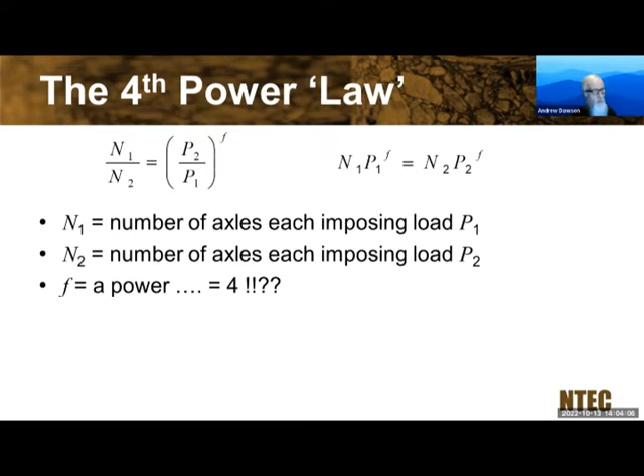So what is the fourth power law? Well, you may have seen it in this way, which says that the number of axles of one particular load type can be equivalent to a number of axles of a different load type according to the relationship shown here, however you prefer to write it. And they then say that F, the power, is 4, maybe.

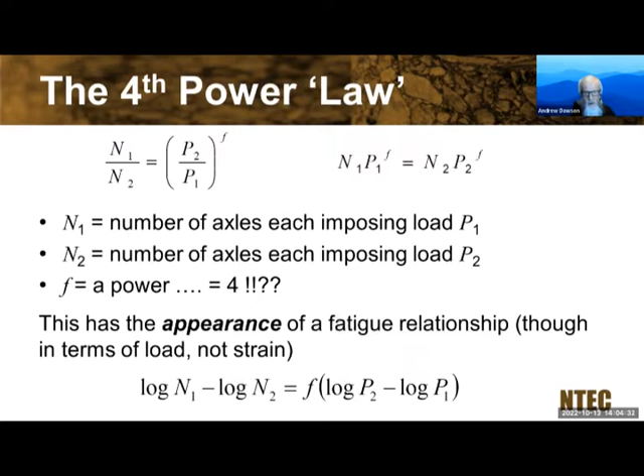Now, that has the appearance of a fatigue relationship. Those of you who know about material fatigue, it's very similar to a fatigue relationship, though it's in terms of load and not strain. Usually when we talk about fatigue, we talk about it in terms of strain. So if I take the logarithms of the equation on the left at the top, I get the one at the bottom there. And I can plot that graphically in this way: logarithm of number of cycles along the bottom, logarithm of load vertically, and you get a gradient of minus the power F.

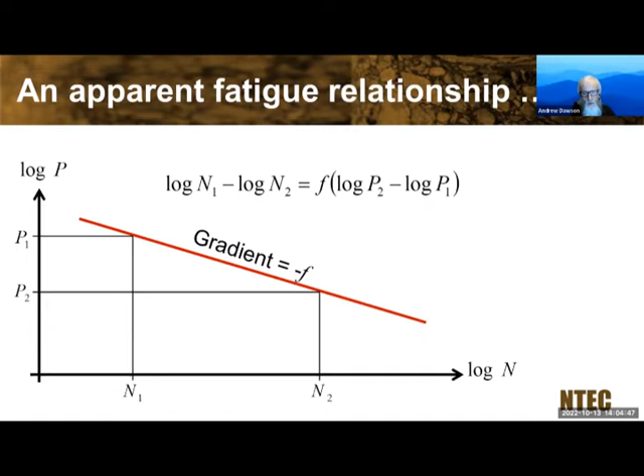So it does look a bit like a fatigue relationship. Why do we need this so-called law? Well, axle loads vary across our pavement. They're not all the same. They vary in magnitude.

Cars less than half a ton, trucks more than 12 - I'm talking about axle loads here. Number of vehicles, well, maybe less than 250 on a low volume road, maybe 50,000 or more on a freeway lane. And they vary in spectrum: there's cars, there's trucks, and the trucks have different axle loads as well.

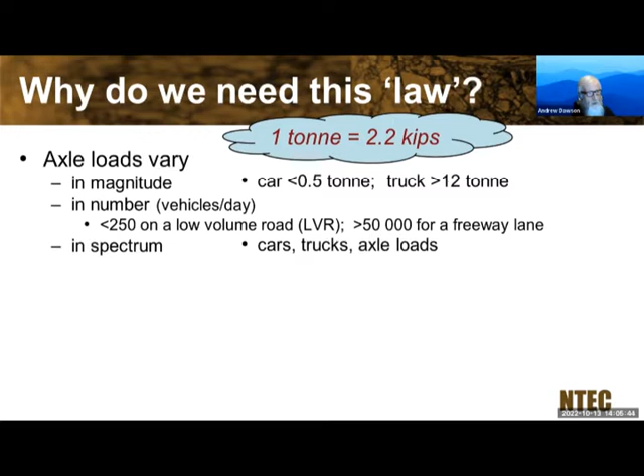And for those of you who won the War of Independence against the UK, but failed to win the war of independence of metric units - I'm going to use metric units, but if you're more familiar with US units, then a ton is about 2.2 kips. Now, the pavement engineer knows increments of pavement damage are somehow proportional to axle load, but only somehow.

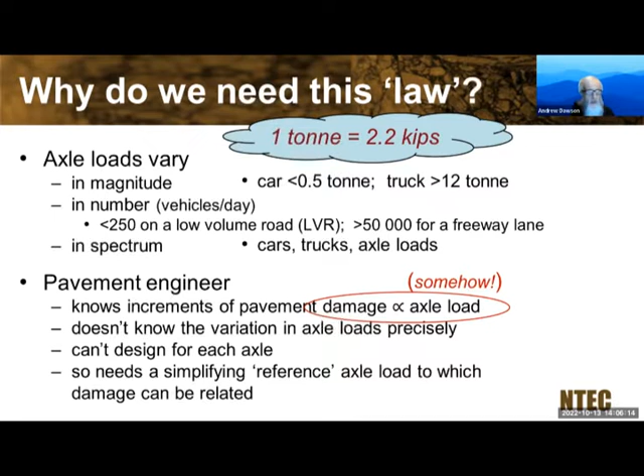He or she doesn't know the variation in axle loads precisely, and you can't design for each axle that the road is going to take, even if you did know all the axles it was going to receive. So we somehow need a simplifying axle load to which the damage can be related. So that's why we need it.

So this above relationship, the fourth power law, allows equivalencing actual loading. Let's call this P2, that's an actual load, and there are N2 passages of it, to some reference loading, which we'll call P1, and there are N1 passes of that reference load.

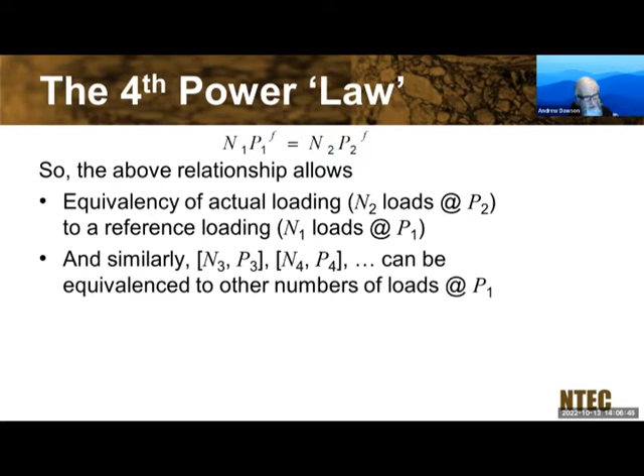And similarly, we can do that for other actual loads, P3, P4, however many you like, and we can equivalence those all back to the standard actual load, the reference one, P1, and we can add up all the numbers that we've got. And so we can get the total number of reference loadings, and we can use that in design.

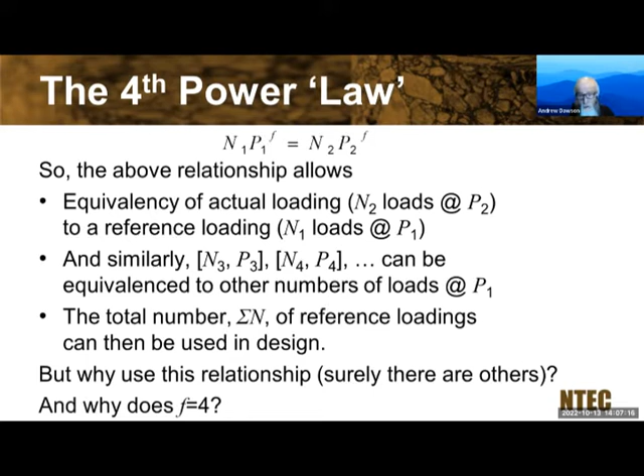But why use this relationship, this power law relationship? Surely there are others we could use to make this equivalencing. Why do we want to use that one? And why does F have to equal 4? Why shouldn't it be something else?

Well, to answer those questions, we need to go back to the AASHO road test. Now, the AASHO road test was performed in the late 50s, early 60s, near you, much nearer you than me. And on a particular subgrade, the traffic all went at a constant 56 kilometers an hour. What's that? That must be 35 miles an hour? Not sure. The traffic was canalized, that's to say every vehicle went behind every other vehicle.

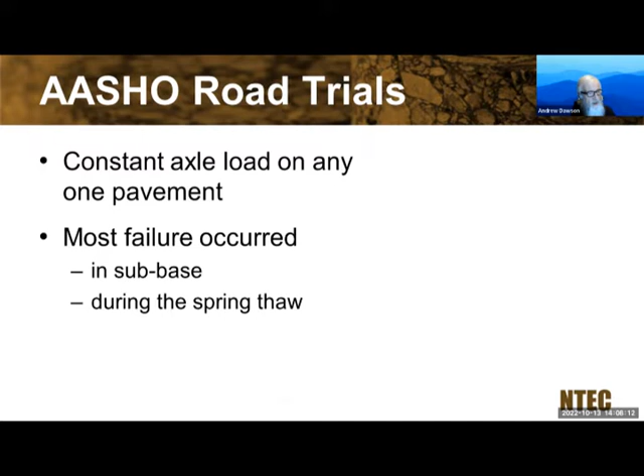And there were a bit over 1 million axle loads over a 2-year period or thereabouts. And on any one particular road or track, there was only one axle load, so there was never a mix of axle loads on the same pavement. There were different pavements with different axle loads. And most of the failure occurred in the subbase, primarily during the spring thaw.

But the failure criteria was serviceability. In those days, there wasn't all the sophisticated equipment we have these days. And so they sat people in a car and drove those people around, and those people assessed the quality of the road through the vibrations they felt in their buttocks. So it's not a very scientific way, you might say, but that's how it was done because that's all they could do in those days.

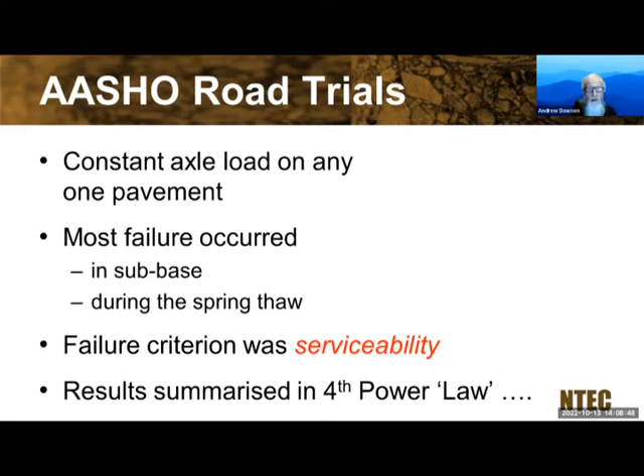And they summarized the results. Well, some of the results were summarized in the 4th power law, as we've seen already. Now, what this says, let's actually look at what this law actually says. It says that the decay due to N1 passes of load P1 is the same as the decay of N2 passes of load P2 at this limit serviceability condition, when the people in the car felt the road was at the same limiting trafficable condition.

Then they looked at the number of passes in one pavement and the number of passes in another with the 2 different loads on, and equivalenced those pavements.

But it's important to know what they were doing and what they weren't doing. So it doesn't say, even though we might like it to say, that cracking or rutting or any other failure method equals decay, because we don't know how those contributed to the serviceability assessment these people did sitting in the back of a car.

It doesn't say that decay is proportional to load to the power 4, or any other power come to that, because they only looked at a condition where the decays matched, where the roughness matched. So it doesn't say that decay is proportional to N either, the number of passes. If they'd only done half the number of passes, would they have felt just as uncomfortable, or only half as uncomfortable? We don't know.

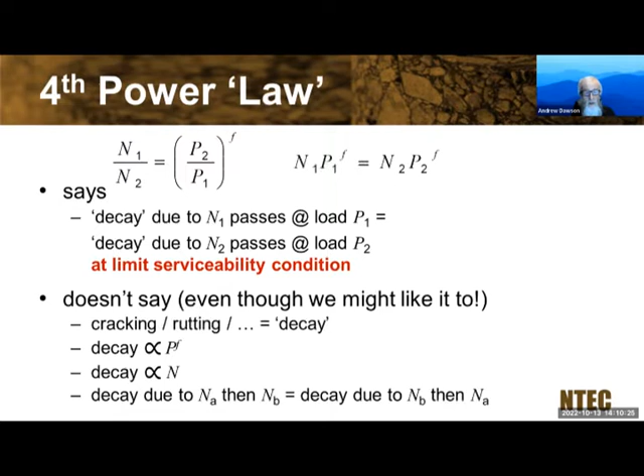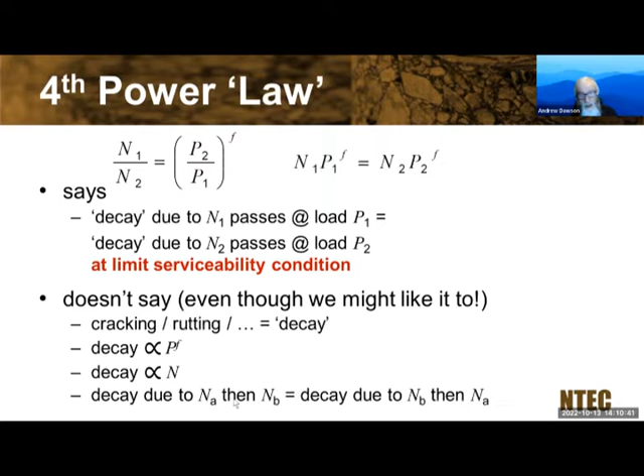And then it doesn't say that if you had one type of traffic followed by another on the same pavement, that would be the same as the order reversed. So it doesn't mean that N passes of load A followed by N passes of load B is equal to the same thing the other way around. Lots of things it doesn't say.

And they produced this chart here, and as you see, there was somewhat fudging to get this. And as you see, actually, they didn't get a power of 4, they got a power of 4.15. But there you are.

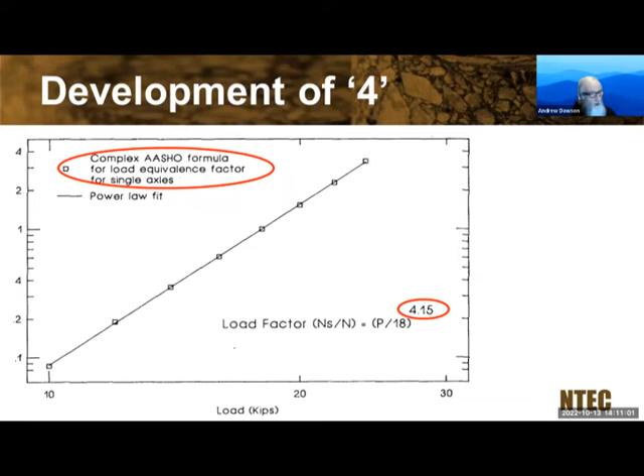Now, added to this has come Miner's law. I don't really know how it got added to this data. The Miner, or strictly speaking, the Miner-Palmgren law, says that you can add up the damage caused by one set of cycles to the damage caused by another set of cycles. So what it says here is that if you've got N numbers of cycles of load I, compare that to the number of cycles you need to apply at that size of load in order to get a unit of distress, whatever distress is, complete distress.

So if Ni is less than the number of cycles to failure, you get a proportion of the decay, and you can add that to decay caused by other cycles, other loads. This says that the order of loading is unimportant. We don't know that, but that's what this relationship implies. It says that damage by twice the number of cycles of any particular load gives you twice the damage.

But it doesn't say that linearity or a power relationship with load is necessary. It does say that linearity with N is necessary.

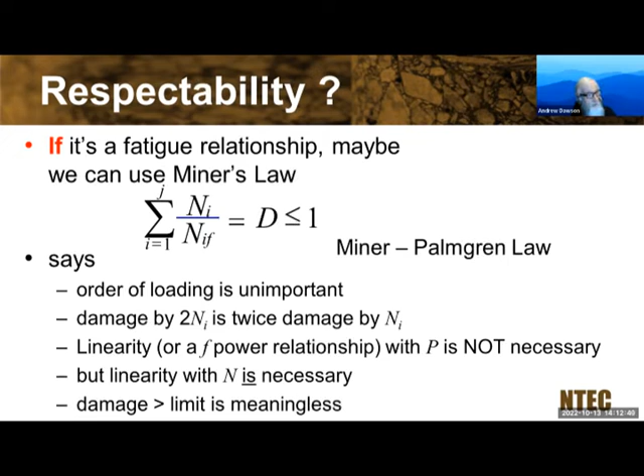And of course, damage greater than the limit is meaningless in the Miner-Palmgren relationship. You can only get complete distress, complete decay.

I might also take issue with the word 'law.' A law suggests ultimate truth, like laws of gravity or Newton's laws of motion. But the fourth power law is empirically derived and empirically validated. And as I'm going to show you, there are many counterexamples and invalid assumptions as well. So squashing it into the Miner-Palmgren framework gives it a level of respectability, scientifically speaking, that I don't really think it deserves.

All right, let's move on to look at some of those examples which don't fit. Take a Portland cement concrete pavement.

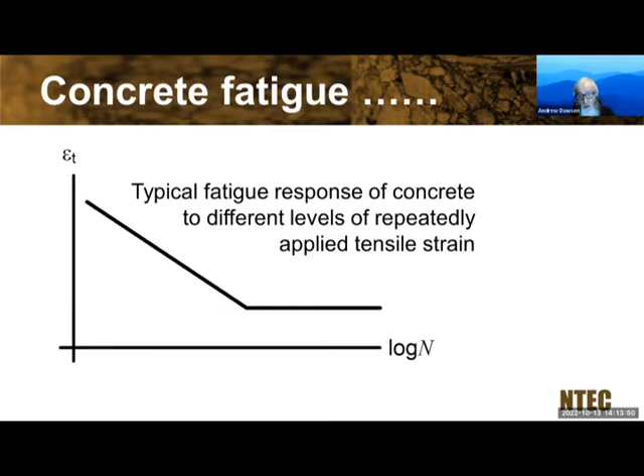We know that if we were to plot a fatigue line, it would look something like that. So there is, at low strain levels, in principle, an infinite number of cycles possible. Well, that won't fit the power law relationship.

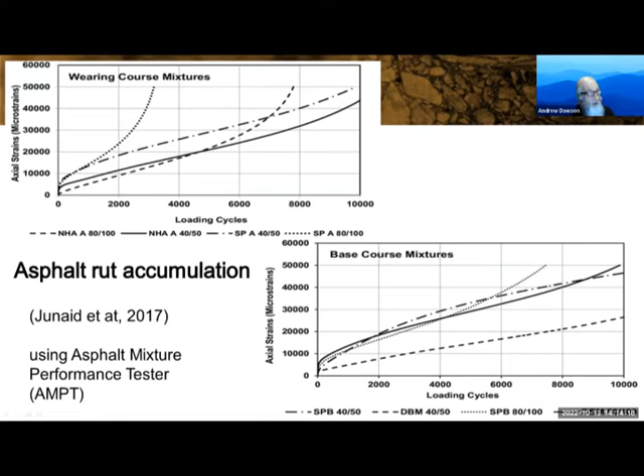Look at asphalt rutting. Here's some data from a variety of mixes. Now, which of those could fit into this? If you take logarithms, will you get a straight line? Well, you might for one of the curves in the bottom figure, but for all the others, you certainly won't. So they don't follow a power law relationship either.

What about asphalt fatigue? I said it has some similarities with a fatigue relationship. Well, here's three asphalt mixes: a foam mix, an emulsion mix, and a dense bituminous macadam, something like an asphalt concrete. This data is from various people, but plotted on this chart.

So let's fit this to the... it's not exactly the fourth power law because we're using a strain ratio here, not a load ratio, but forgive me for a moment. So the slope of this line, if you convert that to F, gives you 4.35. Well, that's close to 4, isn't it?

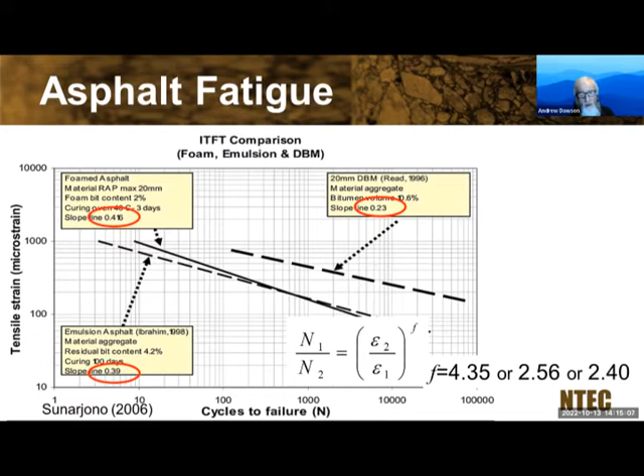Sounds good. What about this one? Well, that's going to be 2.56, or the final one, that's going to be 2.4. They're quite a long way from 4, aren't they?

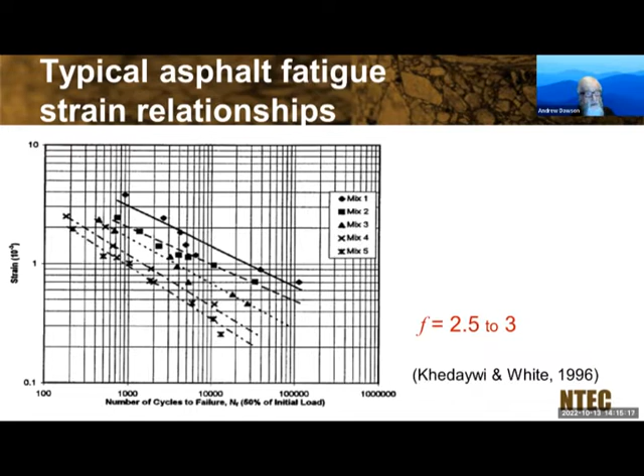Here's some other data, various mixes. F, if you use it that way, is somewhere between 2.5 and 3, not 4.

But when we do a strain-controlled test, and most fatigue testing on asphalts is strain controlled, we're actually getting a reduction in stiffness with loading because we're getting damage as we go along. So the stiffness is dropping, and therefore, to produce the same strain, we don't need as much load. So they're not constant loading tests like pavements were in the AASHO road test.

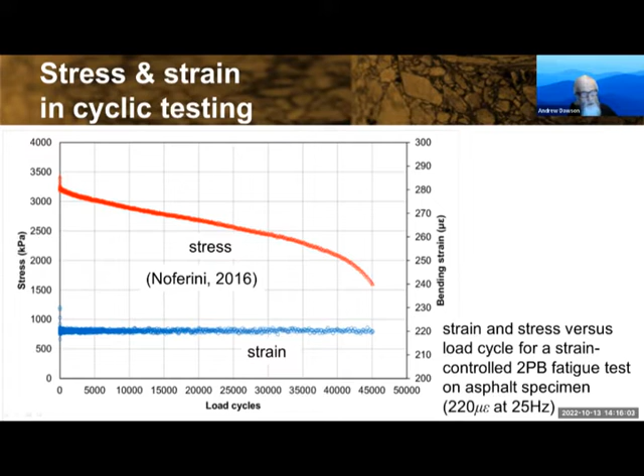So here's some data from which you'll see how the modulus is effectively reducing. Well, the stress is reducing, but because the modulus is reducing, just in order to keep the strain constant.

There are a few published data for stress fatigue lines. Here's one which I dug out from somewhere. So you've got stress vertically rather than strain. We can draw a straight line through it.

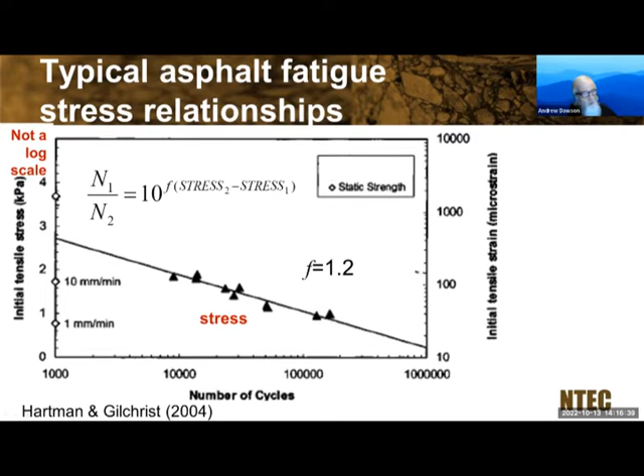So it looks again like a fatigue line, but notice this is not a logarithm of tensile stress, it's a natural scale. So if we're going to plot that with a power law, we'll need to use this equation, and F, from that equation, would be 1.2. So it doesn't seem to work with stress either.

What about granular materials, which I know more about?

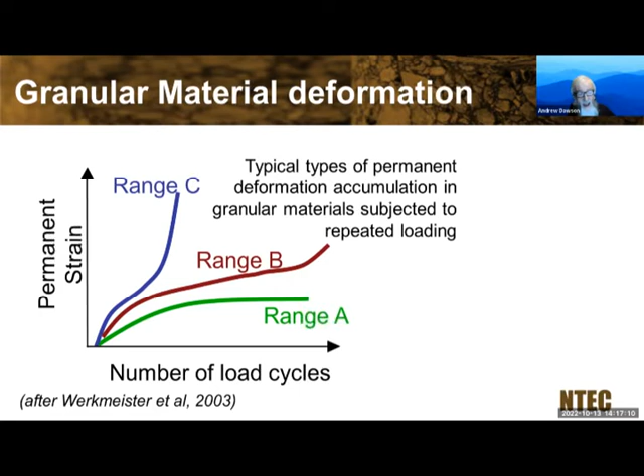I work with Sabine Werkmeister, she's now in Dresden in Germany, and she's done lots of testing on aggregates. You can get different types of behavior at different load levels. At a Range A level, things stop, the rutting stops. Range B, it goes, and then eventually begins to accelerate. Range C accelerates very quickly. You won't model any of those with a power law.

Here's a pavement we constructed quite a long time ago in Scotland, showing the rutting. In this one, we put over vehicles with axles of different weights. In phase 1, we've got a vehicle with a front axle of 3 tons and a rear axle of 8 tons. Using the fourth power law, that equivalence is 1.01 standard axles. We did 1,000 passes of that vehicle, nearly 1,010 standard axle passes. Then we did additional load for 115 passes, and then a really very high load for the remaining 1,000. Using the fourth power law, the equivalent number of standard axles goes from 1.5 to 6.3 on each vehicle.

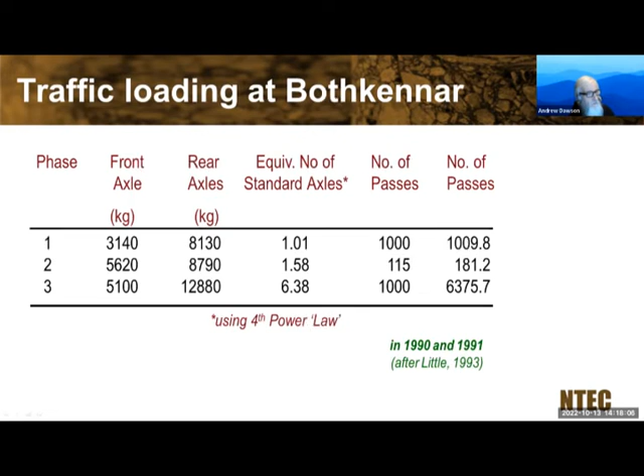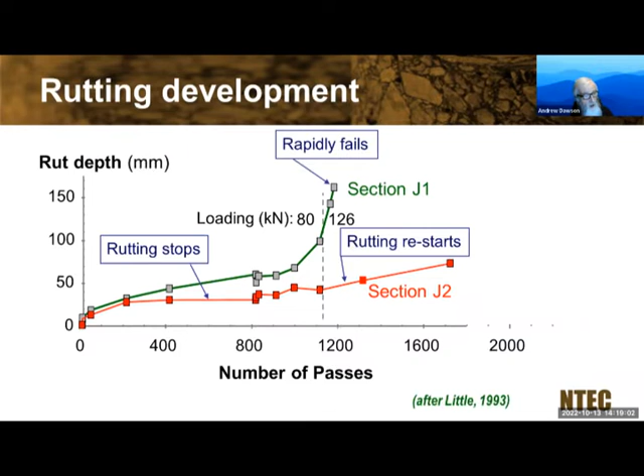You can see how the green line suddenly, when we put the extra load on, shoots up very much quicker. The red line, which had stabilized, then goes into a steady increase. So here the rutting stops. Here this rapidly fails. Here the rutting restarts when we put the extra loading on, but it's still going up in an orderly fashion.

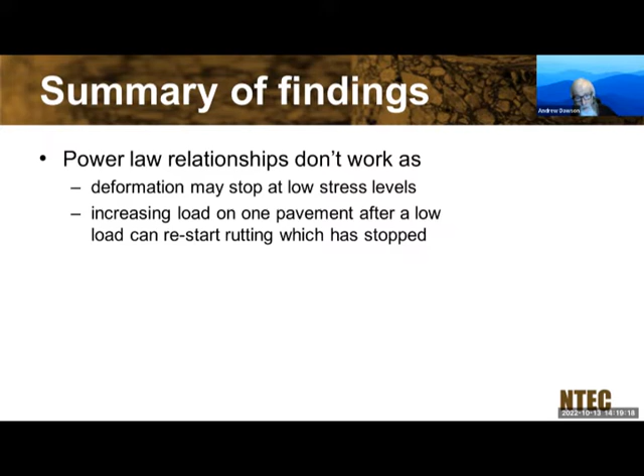So we've got different relationships for different loading and different materials. The power law doesn't work because deformation can stop at low stress levels. It can stop and then restart when we increase the load a bit, and we can get this runaway rutting as well.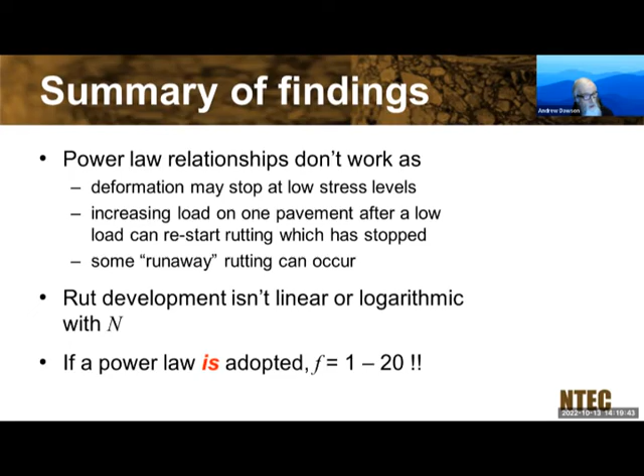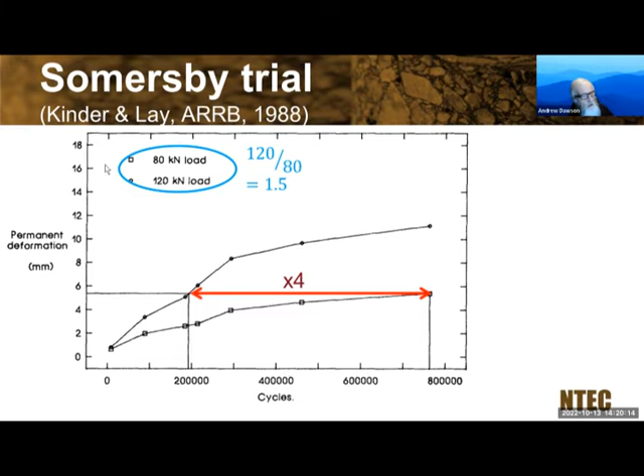Here's a thicker pavement. This was some work done a long time ago in Australia, using the accelerated loading facility, the ALF machine. You'll see they've got 2 loads, an 80 kilonewton, 8-ton axle, and a 120 kilonewton load. So the ratio is 1.5 times bigger for the second loading. Now, this distance between these is about 4 times. So that would suggest a power law of 3.4. 1.5 raised to the power 3.4 gives you 4, which is the distance, the difference. So there seems to be a 3.4th power law.

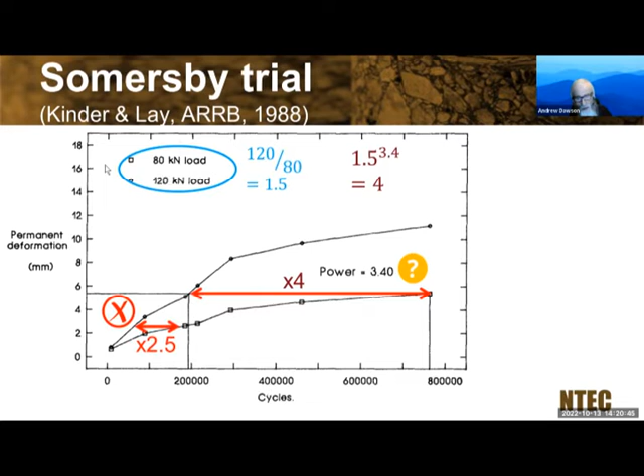Maybe that's not too far from 4. What do you think? But had we done it down here, look at the difference here. The difference here is only a factor of about 2.5. So certainly we get a much lower power law down there. Certainly doesn't work down there.

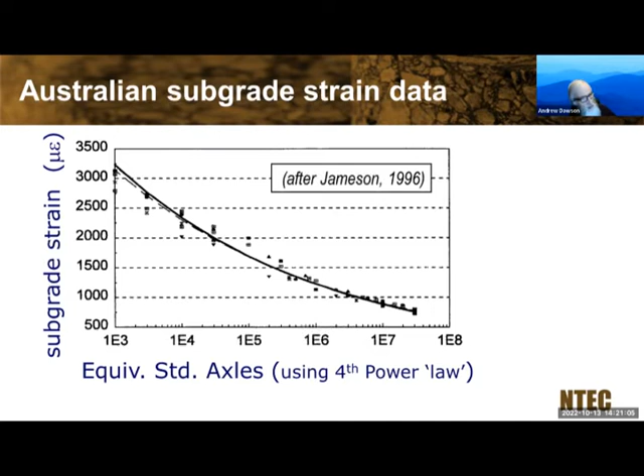Some other Australian data. Here they've got the subgrade strain, which is often related to rutting of a pavement, with equivalent standard axles using the fourth power law along the bottom. So there's some relationship for a range of pavements, I think about 25 pavements, relatively thin asphalt. They looked at the vertical transient subgrade strain in the pavement. They had instrumented pavements, and related that to rutting failure, finding that they could say the number of equivalent standard axles was related.

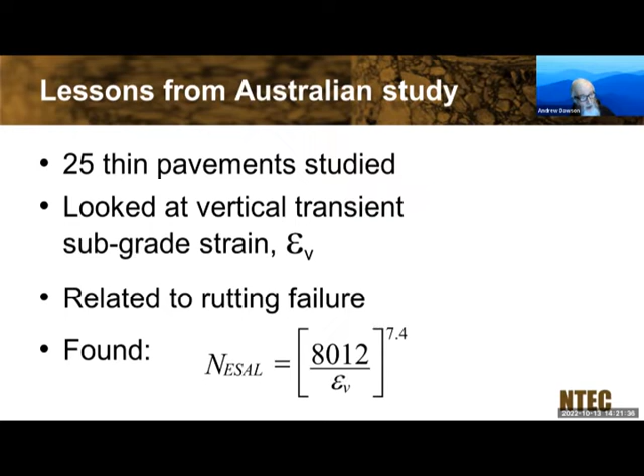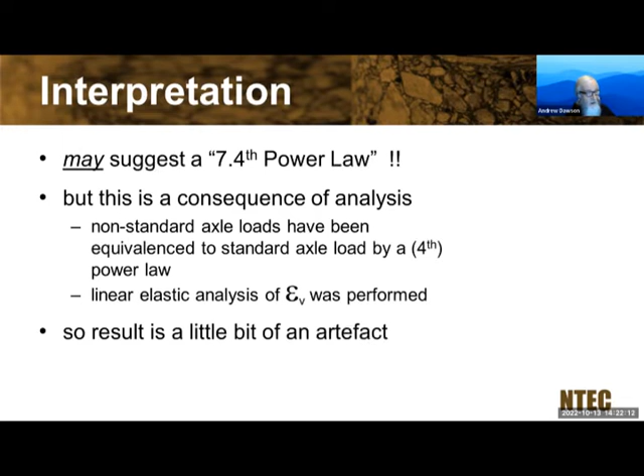This relationship here, to the vertical subgrade strain EV raised to the power 7.4. So maybe this is a 7.4th power law, but it's really a consequence of the analysis, because the non-standard axle loads which weren't actually at a standard axle were equated to a standard axle in order to do the working. So they've made a fourth power law assumption at the beginning, and then done a linear elastic analysis to help them with their interpretation. So the result is rather a bit of an artifact, but it doesn't look like F equals 4.

Here's some lessons from the heavy vehicle simulator, which was used in Scandinavia. They had two loads, 50 and 70 kilonewton wheel loads.

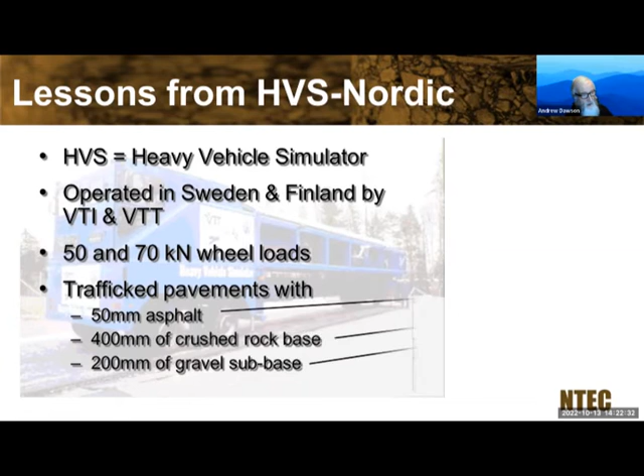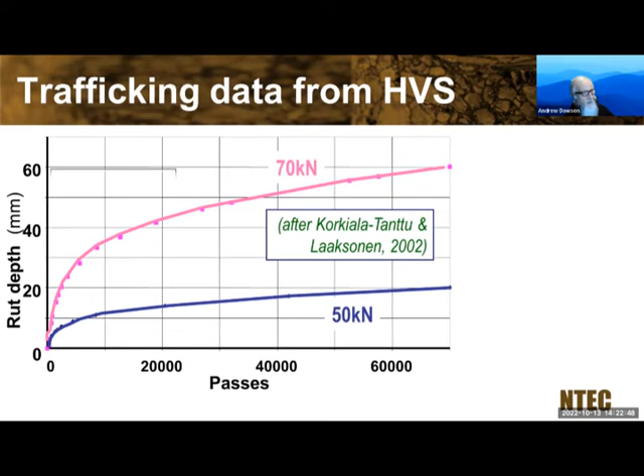They trafficked pavements with a 50mm thick asphalt, so quite a thin asphalt. Here's the data. You can see they put over, I don't know, maybe 70,000 passes or so, and you see the rut depths developing with the two axle loads. There was a shift at the beginning because of some initial settlement.

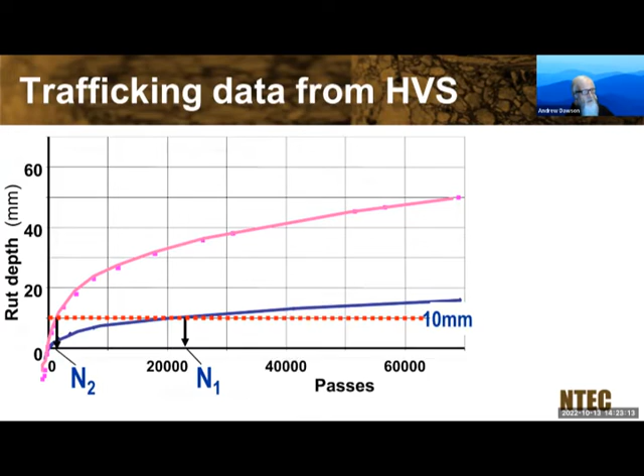So we need to replot that. Now if we take, say, a critical rut depth of 10mm, we get the number of passes at the low axle load to achieve 10mm and the number of passes at the high axle load to achieve 10mm. We can take those two values of N, make a ratio of them, and plot that on the left of this figure.

So on the left of this figure you've got the ratio N1 over N2, plotted against the depth of rut. At the 10mm point, the ratio of the number of passes is about 12. But as we choose other rut depths, we get other ratios of N1 and N2. It's not a constant ratio across different rut depths.

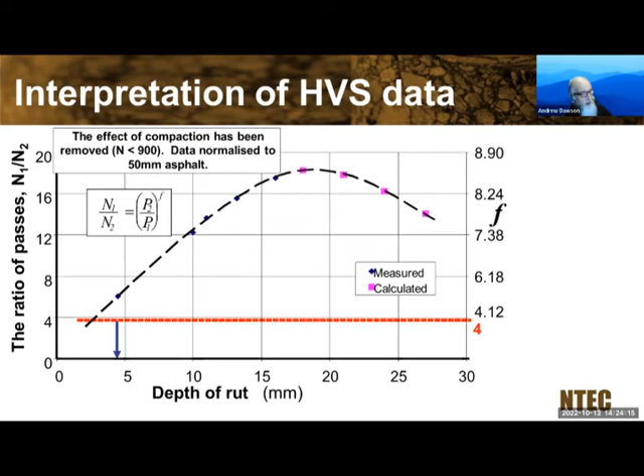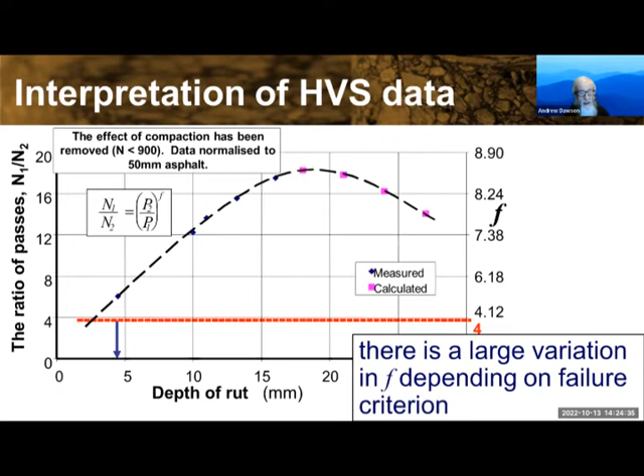If we interpret that in terms of a power law relationship, since we know P2 over P1 is a constant, 70 over 50, we get power laws somewhere between about 4 and 9. The value of 4 occurs at a rut depth of about 2.5mm, which is probably an unrealistic rut depth to design a road to. You might want to design to a 10mm or 12mm rut depth, in which case you need a power law of around 7 and a bit, or 8, on this trial.

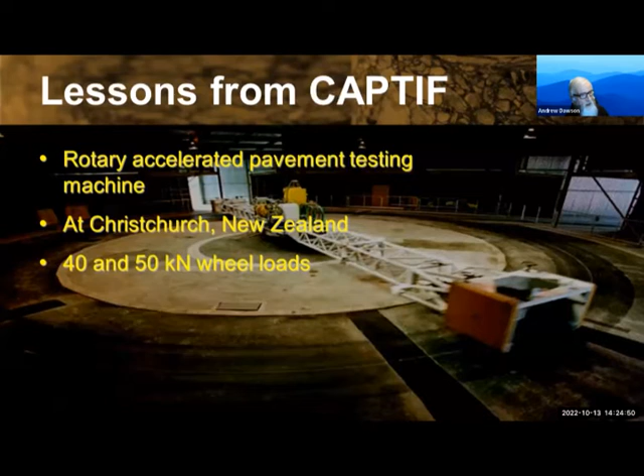Some more data, this time from New Zealand. They have a rotating accelerated pavement testing machine, and they tested pavements with two loads of 40 and 50 kilonewtons. Again, they had thin asphalt — here's not actually one of their pavements, but similar to one of them. And here's the data they obtained.

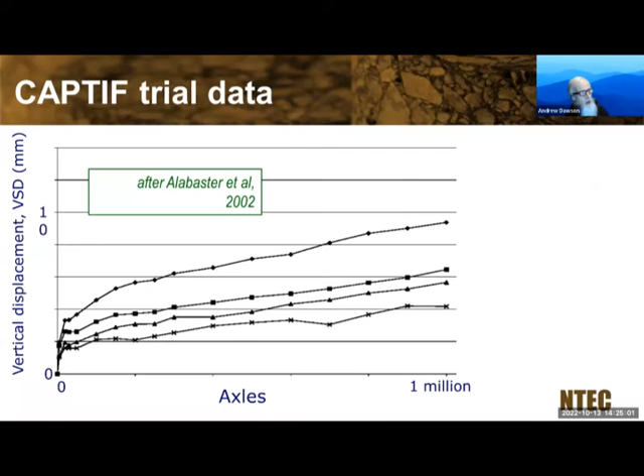It's not actually rutting being plotted here, it's something similar which I'm not going to explain — vertical surface displacement — but it's akin to rutting. Here you've got the 40 and 50 kilonewton tracks for pavement D, whatever pavement D was, and then the 40 and 50 kilonewton tracks for pavement B with different construction materials.

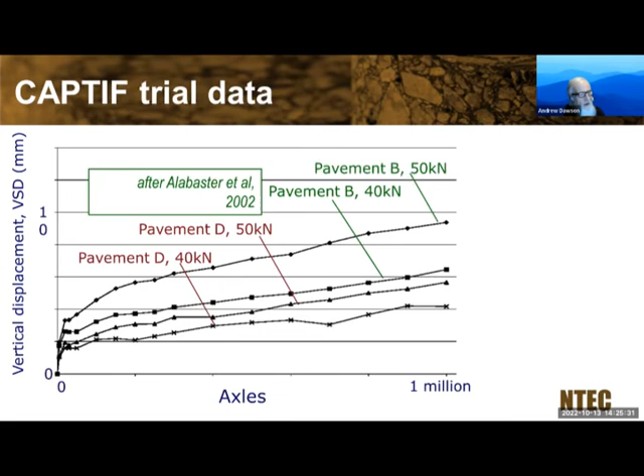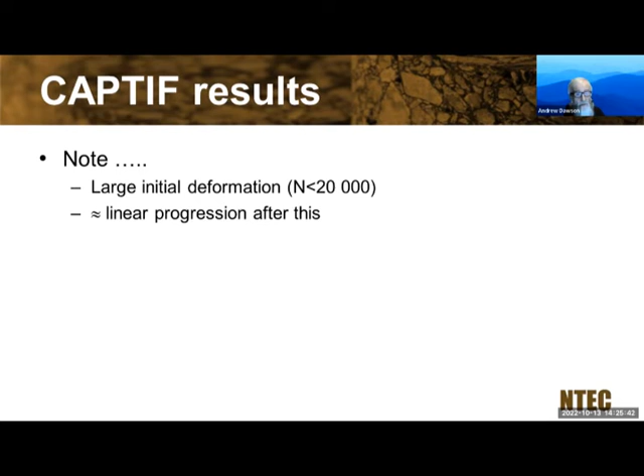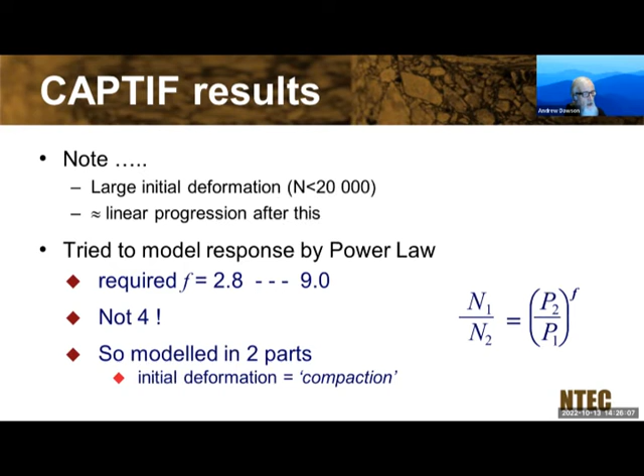There was large initial deformation in these, up to about 20,000 passes. After that, there was broadly speaking a linear progression of decay. They tried to model this using a power law and required an F value somewhere between 3 and 9, not 4. So they thought maybe we should model this in two parts: an initial deformation, this compaction that happens in the first 20,000 cycles, and then the more or less linear bit afterwards, what they call wear.

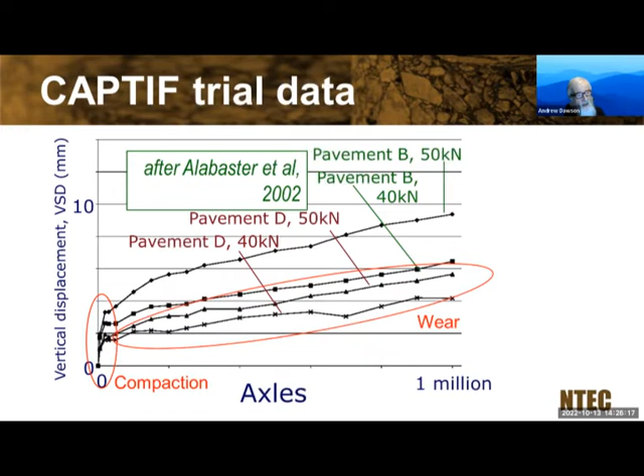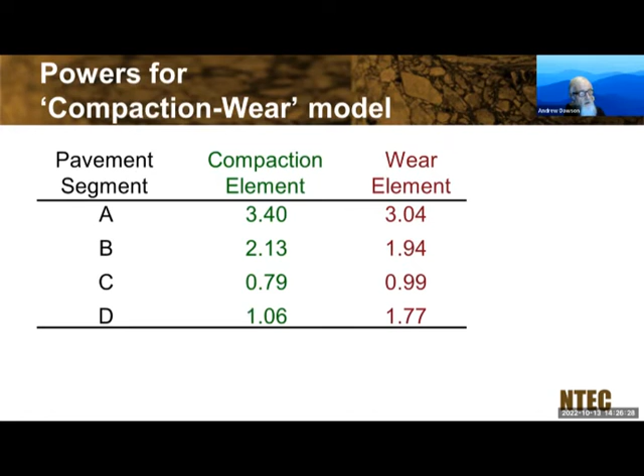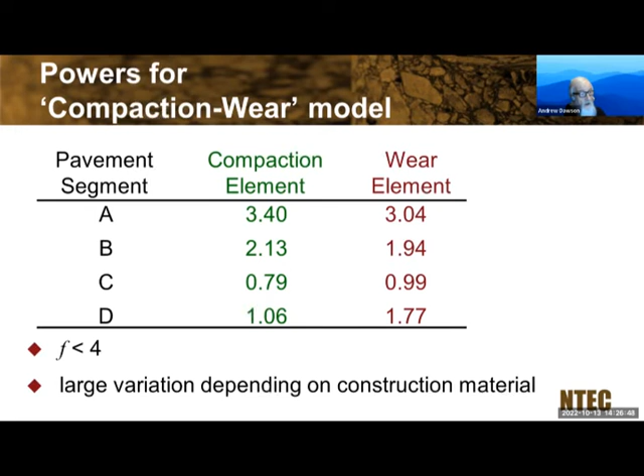So in this case they took this bit as the compaction element, and this bit as the wear element, and tried to fit a power law relationship to both. Here's their data: for the compaction element, they got values for F between about 0.8 and 3.4, not 4. For the wear element, values around 1 up to about 3, again not 4, always less than 4 in this case. There's a large variation though, depending on the particular pavement construction.

I could show you some more data from South Africa, performed in 1984, again using heavy vehicle simulator trials. They got F varying between 1 and 13. For granular pavements, 1 to about 8.5. They found higher values if the aggregate was crushed and dry, lower if it was wet or uncrushed. Chen and others did work at CRREL, and with a range of loads found that F was greater than about 8 for half of the trials, and that it increased with water content for granular bases, since some of the others had asphalt bases.

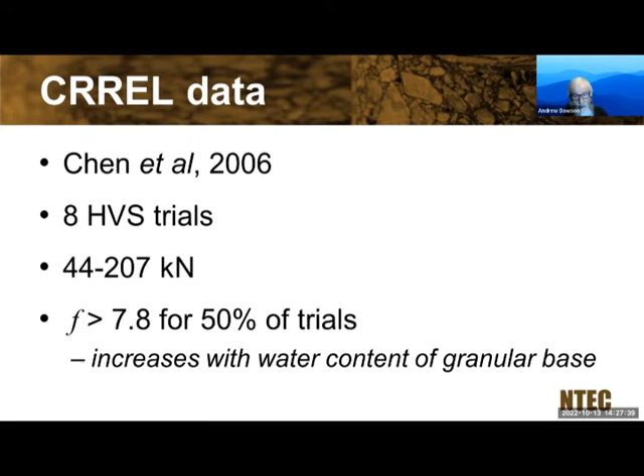So what I've tried to show you here is that if you look at data which is available, you can get almost any result out of it.

So let's have a little bit of discussion about this before I wrap up. We've seen that underlying the fourth power law and its use, its application, is the assumption of a fatigue relationship. But fundamental to fatigue is that you consume fatigue life. As you do cycles of loading, you consume some of the life. So the damage has got to build with the number of passes.

But we've seen that for several materials, concrete, asphalt, granular materials, there can be quite a number of cases where actually damage doesn't build with number of passes. Stresses are low, and it doesn't build with number of passes. And we might imagine in thick pavements, the strains and stresses at the bottom of the pavement are not going to be very large, and therefore at the bottom of the pavement, we may not be getting damage at all.

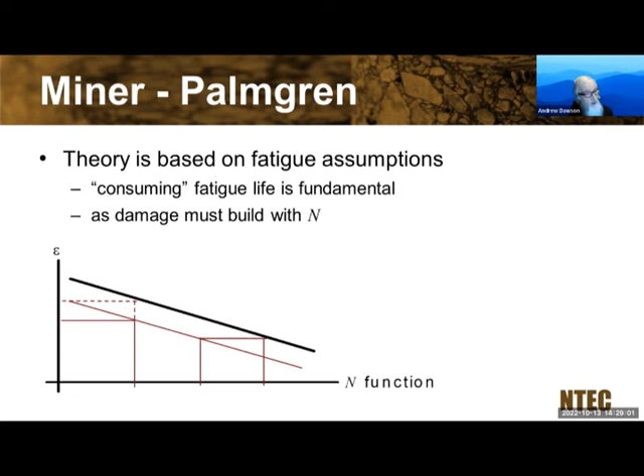So that's the first problem that we've got with it. I think we've seen that little of the approach derived in the original AASHTO Road Trial is really appropriate for what we do with pavements today.

As I've already explained, the AASHTO Road Trial was based on consecutive passages of the same vehicles over one road. And it was assessed by serviceability, not by the structural things that we're generally interested in modern pavement design. We're interested in fatigue or cracking or maybe other failure modes, shoving or whatever. And we try and have sophisticated models to look at those.

But we don't relate it to serviceability, to a panel of riders. So rather different.

But equivalency and cumulative damage are nevertheless really attractive. I might also say seductive ideas, because they allow us to simplify things for our pavement design. And simplification is something we like, obviously, because that makes our life easy.

But we've got a very complex thing. And if we don't simplify it, what are we going to do? We can't possibly design pavements for every individual loading, at least not at the moment.

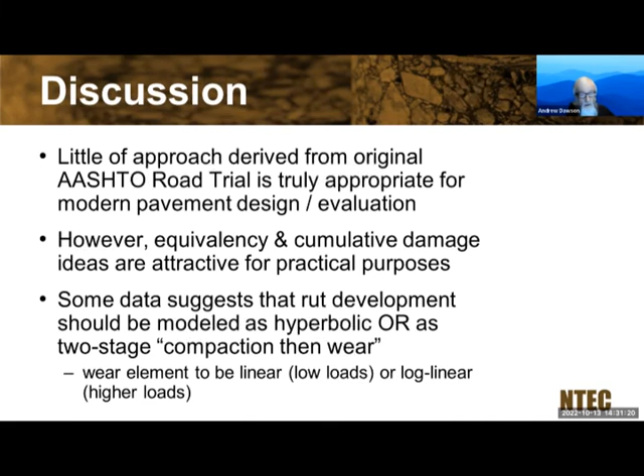It's clearly really important to assess whether there could be a stabilizing response. If you think that your pavement is going to stabilize, the limiting stress or the limiting strain values for a stabilizing response have got to be determined somehow. And that's got to be our target, because if that's the case, we can design for that strain and that stress. And we don't really care how many cycles it takes to get there if it's going to stabilize.

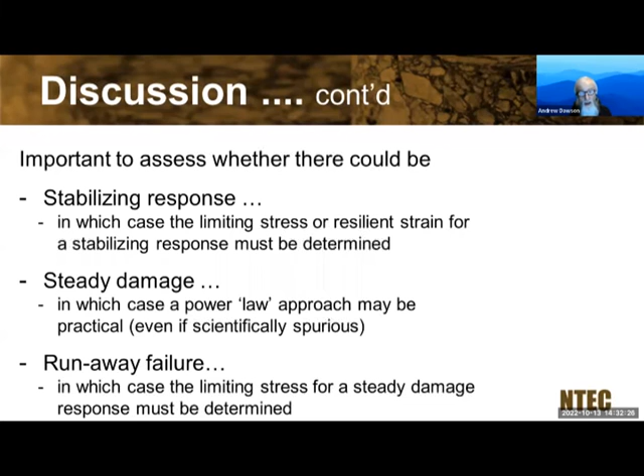If there's going to be steady damage, maybe we can use a power law approach, even if it's scientifically spurious. It may work some of the time, but it's clearly got very limited applicability if we do that. And if there's runaway failure, we need to know what that limiting stress for steady damage is so that we don't exceed that. So we need to know the bounds of that area in which steady damage takes place.

I think I've shown you that materials don't follow a power law approach. So we really shouldn't expect the pavement to do so, as the pavement is just a combination of a series of materials. It would be really surprising if a power law applied to the pavement when it doesn't apply to the materials.

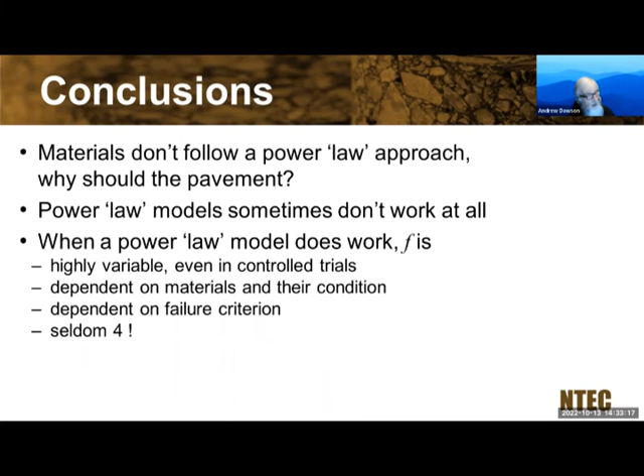Sometimes power law models don't work at all. And when it does, the exponent F is seldom 4. It's highly variable, even in controlled trials, let alone in real pavements where all things are changing. It's very dependent on materials and on the condition of the materials, and it's dependent on the failure criteria we apply. And as I said, it's not usually 4 either.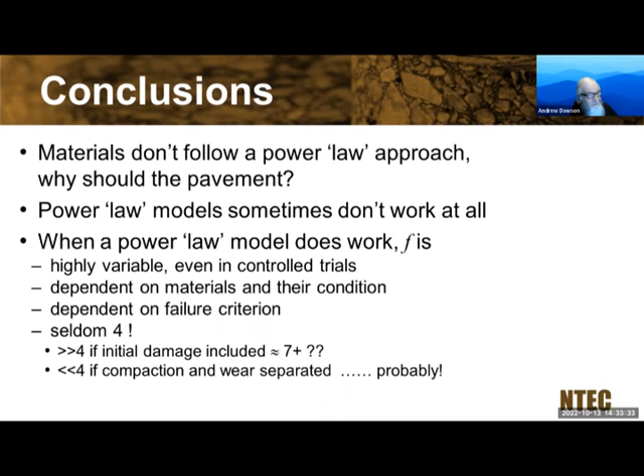Maybe if initial damage is included, it ought to be around 7, but that's a very big maybe. If we separate them out, maybe it should be less than 4, probably even less, I don't know.

So I asked you a question at the beginning: do you believe in UFOs? Do you still believe in the 4th power law? If you were agnostic at the beginning, I hope you're now an atheist. Thank you very much.